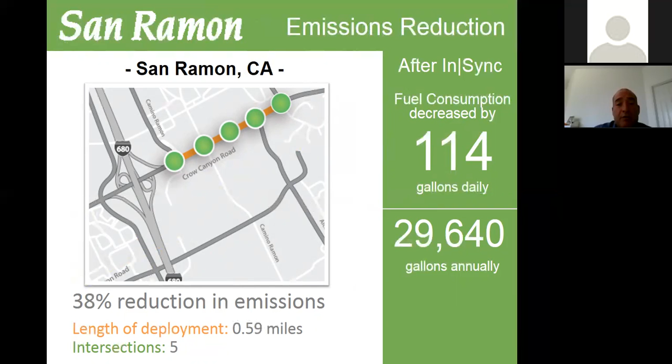And so we're going to use this example here in San Ramon. It's a 5 intersection deployment here on Crow Canyon Road. It's just north of 680. And we were able to cut down on the fuel consumption daily by 114 gallons just on those 5 intersections. And if you were to calculate that out throughout the year on a 5-day work week, that would be almost 30,000 gallons of fuel annually.

Here's another impact scenario and success story for us. In San Diego, the La Jolla Parkway. InSync is great on cutting down start and stop delays through an arterial. It's great for bidirectional progression, cutting down and better balancing the delay of a system. But what happens when we introduce InSync into a completely saturated system?

The city of San Diego wanted to give us one of their toughest saturated areas to try to manage. And they found it here on La Jolla Parkway and Torrey Pines Road. It's just 3 intersections. And the reason there's so much saturation is due to the variability in traffic that can happen. As you can see here, the La Jolla Parkway and Torrey Pines Road, all of that leads to the beach. So you can imagine the variable traffic that can happen unexpectedly during the day and throughout the year and throughout the week.

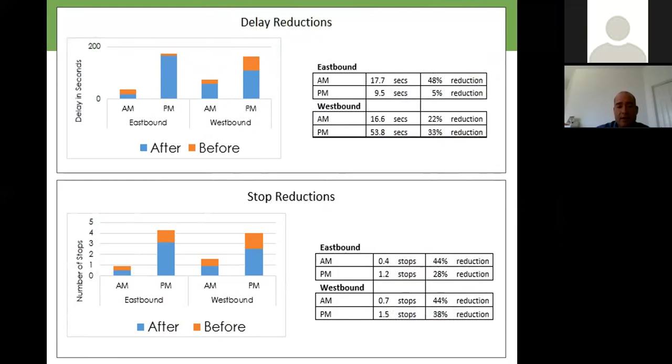Some of our before and afters show the delay and stop reduction improvements that happen on both the AM and the PM peak period. The AM peak eastbound, you can see, shaved almost 18 seconds off of the commute, which was a 48% reduction in time. For the stop reductions, we showed a 28% to a 44% reduction.

And some of the other stats of the travel time and speed, we had an increase of up to 40% in the eastbound direction, nearly a 7 mile per hour increase. We also see the travel time reduction that took place on the westbound, 17 seconds, 13% reduction. And this was just traveling through a very small saturated network.

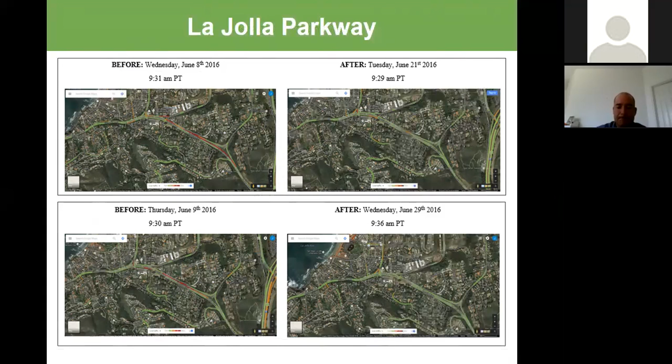So one of our last examples of impact and statistics that we've had on agencies like yours and throughout the United States, North America, frankly, is VDOT did a very extensive study. It was a 5-year study. It was 151 intersections over 13 corridors. And here's some of the numbers that came from that. There was a 67% decrease in stops, 58% increase in average speed, 36% decrease in travel time.

But what was the most telling of the metrics and what impacts us the most, and I would say everyone, is that 17% reduction in total crashes. And it wasn't just rear end crashes, it was angled collisions as well. So the system not only promotes throughput and getting their travelers to their destination safer and faster, but this also starts introducing an element that makes the driver start paying attention to the driving task. And this is critical for safety, that drivers pay attention to the driving task. And InSync has a tremendous impact on that safety.

Also, the mainline travel benefit that you can see here, some of the ROI numbers that a lot of your constituents want to look at, is you can see here that the mainline travel benefit was $43 million from this investment. And as you can see there, annualized out through a benefit cost ratio, it was nearly 9-1.

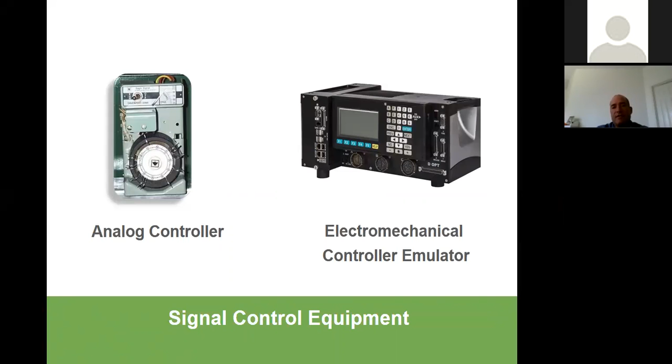But at the end of the day, that latest and greatest traffic controller is just emulating that analog controller on the left. That's why we call these electromechanical controller emulators. They work off of pre-programmed operations, pre-programmed cycles, predetermined sequences. And that little bit of intelligence that has recently been put into these modern controllers, it doesn't help you manage variable traffic any better than the one on the left.

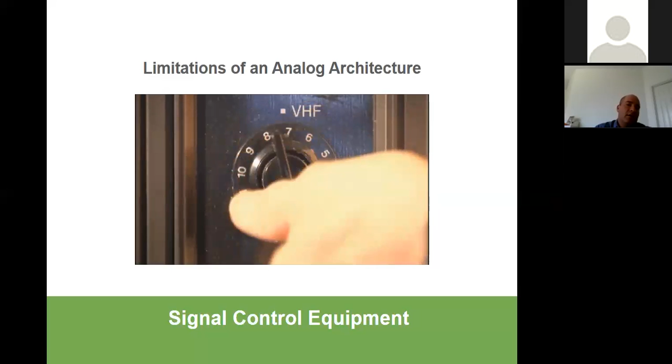So here's a simple example that we like to use to describe these analog operations. Think about an old television set and that dial that you used to have to turn. If you were on channel 5 and wanted to go to channel 10, you had to go through 6, 7, 8, 9, all the way to 10, through all those different states or phases to get to that desired state. So that's an analog architecture. That's what that old electromechanical controller was doing, and it's pretty much what the modern controllers are doing today.

That was adaptive control. It was an intelligent, fully actuated system. It was dynamic, it was flexible, it was fluid, and it could make those changes happen immediately. That control officer was not locked into any cyclic service of any kind. When we changed to those electromechanical controllers, we lost all of that intelligence.

And that's essentially what InSync is. It's an artificial intelligence that sees what's happening in the intersection, and it can look down the line globally, and it can identify these platoons of vehicles to get them through the corridor. It was flexible, it was fluid, it was dynamic, and it was immediate. And that's what we are replicating with the InSync system.

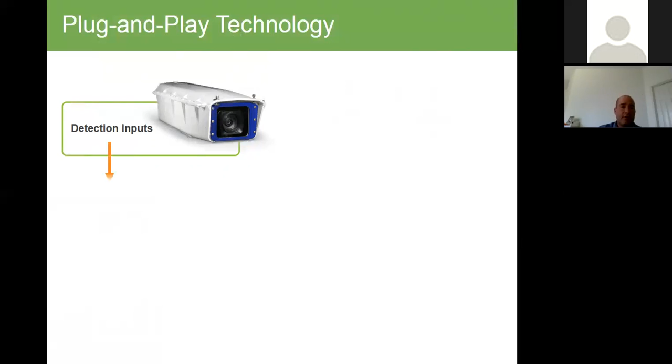And it can assess more than just vehicle presence. It can assess more than just if something's there or not. It can actually assess a queue by lane, and that information is directly put into the processor in the cabinet. That processor receives real-time information, second by second, and because of the ability of InSync to choose its desired state, it can make an immediate action, immediate decision, rather than something based on a cycle-based operation.

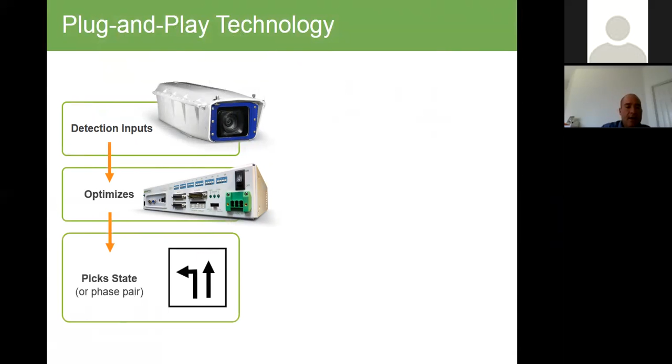InSync doesn't replace anything in your cabinet. It integrates with any type of controller in cabinet. And what InSync does is digitally chooses the state it needs to be in, serves that call to the controller for only those 2 phases to be served.

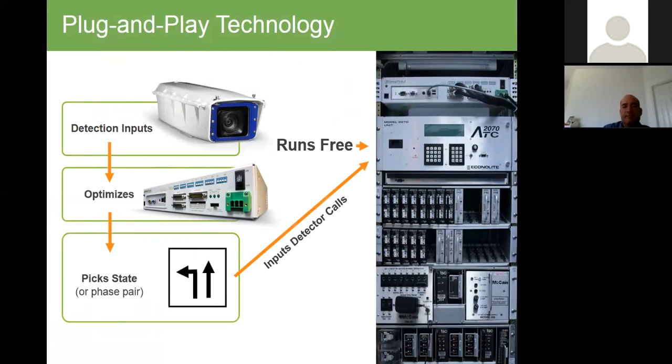Now let's talk about the local optimizer. InSync's cameras are able to do more than just simply view presence detection. During the installation, we not only set up our detection zones in those lanes, but we also draw occupancy segments going across, as you can see there. InSync constantly measures the volume of these occupancy segments and allows it to give it a queue, an actual queue of cars, and it can assess a delay.

These percentage occupancy type and weight numbers help InSync to determine the best way to reduce those numbers, which state to go to next, which has the greatest demand in your intersection. It does this all while achieving great bidirectional progression through this global network of intersections.

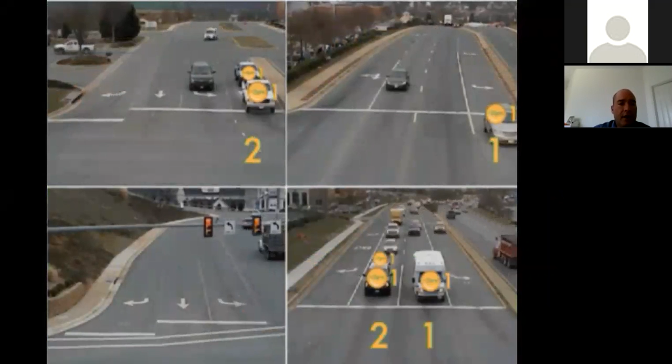And there's a funny analogy that we like to use. It's the greedy algorithm and this greedy cop at the intersection. If you'll look up there in the top left corner of your screen, you can see that when a vehicle pulls up to an intersection, it receives a token. And for every 5 seconds that it's there, it receives another token. And it keeps giving them a token for every 5 seconds for every vehicle that's in the intersection, for as long as they're in the intersection.

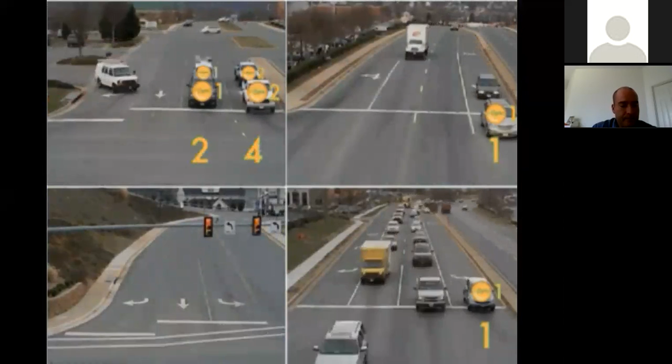But our traffic cop is a greedy cop, and he doesn't want to give out those tokens. He wants to get those tokens back. He wants to keep the vehicles moving. So what that greedy algorithm does is it turns to the state that has the most demand, that has the most tokens. That state gets the attention first. So in using that greedy algorithm, InSync can optimize at the local intersection based on real-time demand and delay.

The second-by-second analysis of the intersection ensures that each phase is being served with a priority and not a predetermined cycle. If we see here at our phase sequence A1, we need 18 seconds, we can give it 18 seconds. If we find out as the cars move through, it needed less, we can then move on to the next phase. If we see that we need to extend that queue, then we can do that as well.

But as you see, we don't have to move to A2 in our sequence next. We can simply say, if C2 would be best served, then that's what we can go to immediately next. So not only can InSync make mid-cycle changes, we're able to make mid-sequence changes as well. And if we put that together with the global optimizer InSync has built in, we have the most powerful adaptive system on the market today.

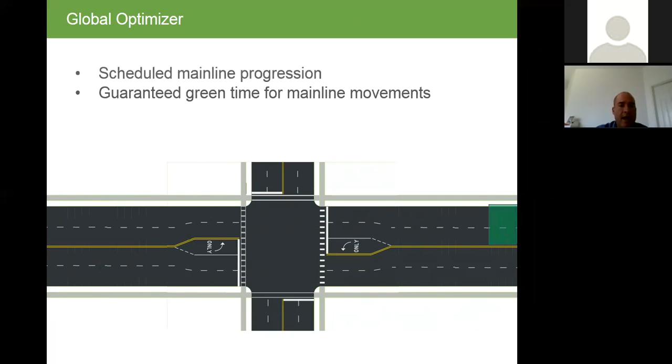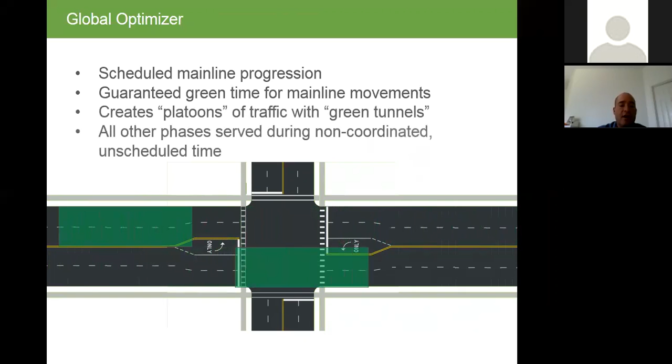So when looking at the global optimizer, it will schedule mainline progression, and our aim is to create these platoons of traffic moving through these green tunnels. All the other phases are then being served during the non-coordinated, unscheduled time.

So in tying these concepts together, this digital operation that's going on in the intersection, the local optimizer and the global optimizer, we're going to use a calendar here for an example. And if you use Outlook, this may be familiar to you. I'm going to use 30-second increments of time, 10-second increments of time.

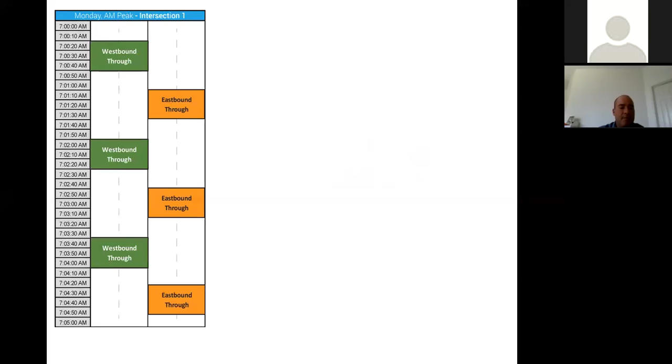And as you can see here on intersection 1, Monday morning, an AM peak, an adaptive configuration. And we may serve the westbound through for 30 seconds, followed by the eastbound through. Now notice they don't have to be scheduled at the same time because that may promote a better bi-directional progression. Now in the global optimizer, we repeat that pattern. Now we have our mainline movements already scheduled for a particular configuration, and we do that for the rest of the intersections in the corridor, intersection 2 and 3 for this example.

Now the time between the start of one coordinated appointment, and when that coordinated appointment starts again, that's called our time between tunnels. So let's take a look at that white space here, this gray area that I have highlighted. That's the time that's unscheduled, those side streets, the uncoordinated through movements.

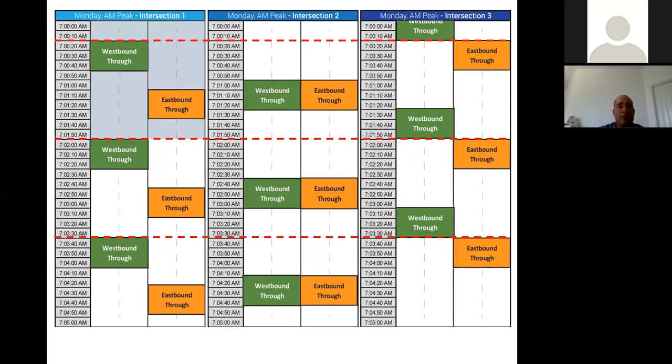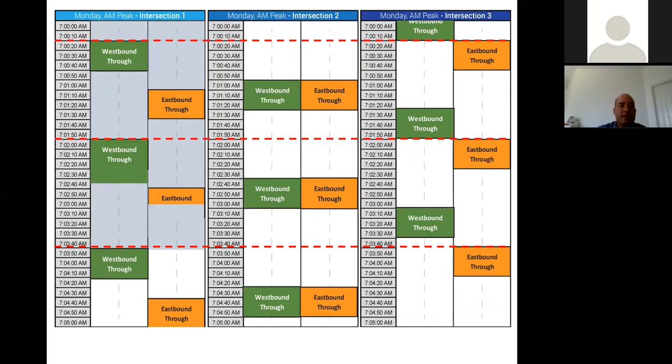This is where the local optimizer will go to work, doing what's best based on the real-time conditions that it sees. So let's say that during this unscheduled time, there's an influx in northbound traffic. InSync says to itself, I didn't have enough time to adequately serve all the movements in my northbound traffic. What it does is it simply calls down to the rest of the intersections in the global network and lets them know that we really need some more time to push this traffic through. So everyone in the network increases its time between the tunnels. And this allows for more unscheduled time to adequately serve all the movements.

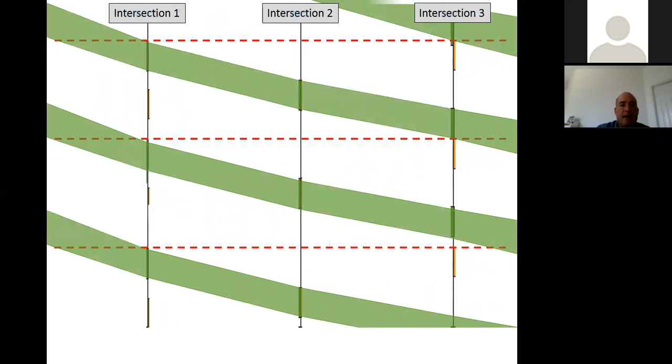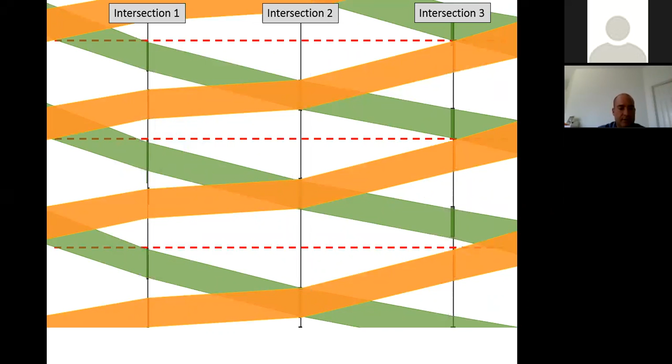So when you shrink that calendar down and you connect the dots, it's upside down, but what you have is a time-space diagram. And where we don't have a global movement, where those black boxes are flashing highlight, that's where that local optimizer is going to work, serving the movements based on real-time conditions. So you can not only make mid-cycle changes, you can make mid-sequence changes as well.

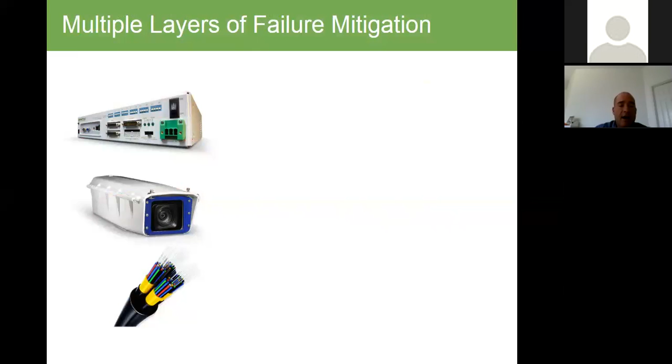We often get asked about failure mitigation. InSync was designed with multiple layers. For example, if a motherboard goes out on one of our processors, it simply falls back to a controller operation by the dip switches that are on the front that allows those detector calls to go through onto the controller and let that controller go ahead and operate in an actuated state. If there's complete failure, we simply fall back to the controller operation. And remember, we're not replacing anything in that cabinet.

If a camera goes down, the InSync processor functions as its own storage device. There's no central server that's reliant upon this data and upon the operation of the system. Each of those processors has 30 days' worth of stored information. If that communication goes down, going into the corridor, well, the processors still continue to communicate. So your adaptive process is still happening.

If the interconnect going into the corridor goes down, the adaptive process still works. You just don't have that ability to grow and shrink the tunnels if that interconnect between the intersection goes down. So these multiple layers of failure mitigation are very important to a continued operation. And not relying on a central server and not relying on communication going into the network for it to continue to work is what InSync is really designed for, to help mitigate some of that downtime and still have an adaptive system that's working.

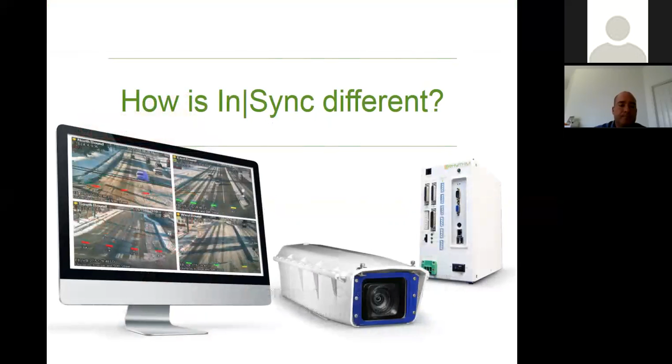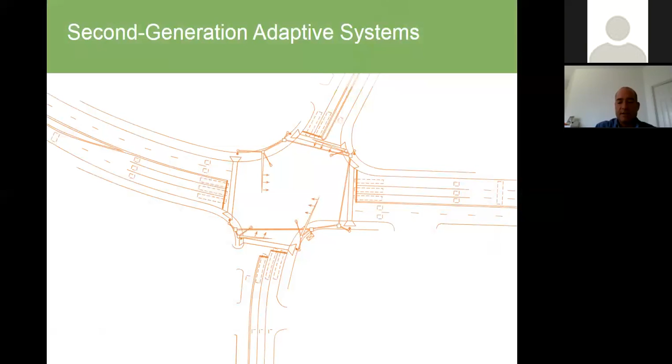So how is InSync different from some of the other systems that are out there? There's a consultancy called Urban Systems Associates in California, and they wrote a paper on the different generations of adaptive. The first generation would be more of a manual-based system. It was developed in Los Angeles back in the mid-'80s. A second generation system is one that can take all that data and all those numbers and try to do considerations for future cycles using that server and its algorithms. But the challenge with those systems is that it requires multiple amounts of detection to get all that data, just to get the best out of the system you have.

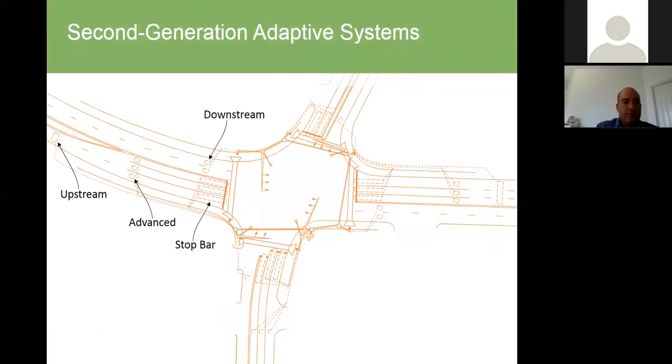So if we throw a few cars onto the intersection here, you can see them triggering detection points, single points of detection. Those could be loops, they could be radars, they could be video. And as you can see, they're placed at the stop bar, in the advanced area and the upstream area. And all this might be needed to make a second generation even work properly. But even with all those deployed detectors, you're still missing a lot of the gray area, as you can see here. Cars can always be pouring on and off mid-block, and that's passing incorrect information down the corridor.

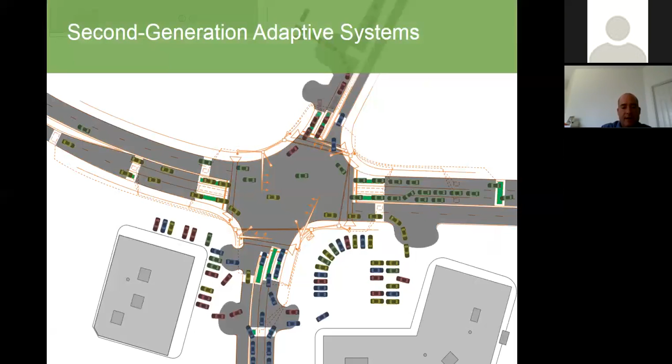So that's why we feel that the distributed architecture of InSync, what Urban Systems calls third generation adaptive, is so much superior. As we introduce these cars on the scene, InSync detectors are able to estimate the entire queue as far back as that camera can see. We really eliminate the significant amount of gray area you saw in the previous slide. We're able to see these cars as they come out of mid-block, and we're not passing on erroneous information down to the next intersection. This is what allows us to make these mid-cycle, mid-sequence changes.

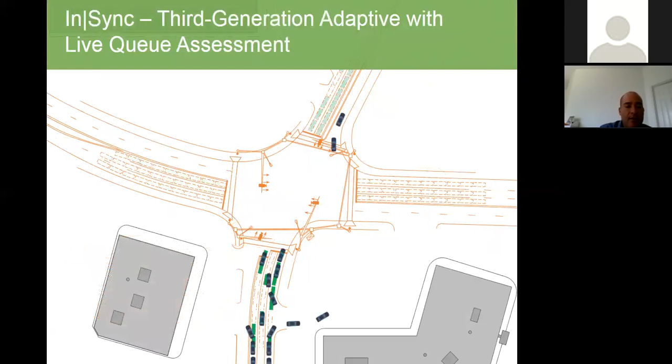So let's compare this on a timing-based system, these responsive type systems of the second generation, compared to the InSync real-time response that the third generation has.

So if you see here, based on the time it takes, if you look at a responsive system, in a second generation system, and it sees that it needs to make a change, that information is pushed to a server. The server then pumps out the new changes that need to be made, but that environment at that intersection has already moved down the road. Not the case with InSync.

Though the mainline movements are pre-programmed and guaranteed within the system, you still have the ability to start and stop those movements early or late. And within that unscheduled time, we're simply serving those phases, those states between the coordinated movements at each intersection. You have the ability to extend those phases, extend the tunnels, truncate the tunnels. And every time you turn back to that local optimizer, the pattern may be completely different. Sequencing may be different.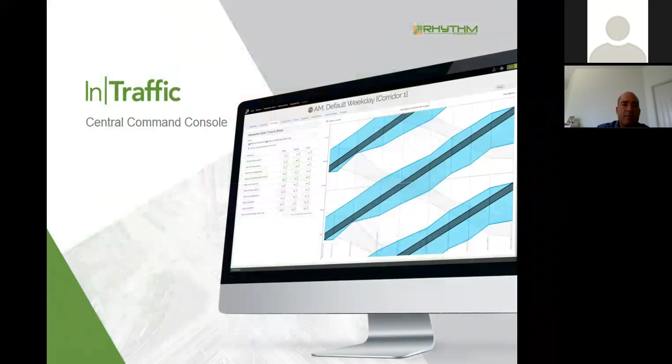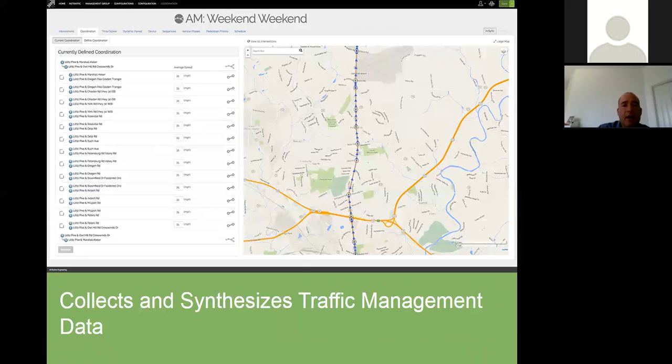Also, InSync has extensive software to help you control all of this. InTraffic is our central command console. You can access this software anywhere. It's not reliant on a server. You can use it from any device that can access your organization's internet. We collect a ton of data, and we're able to push that data to you to help you better manage your system.

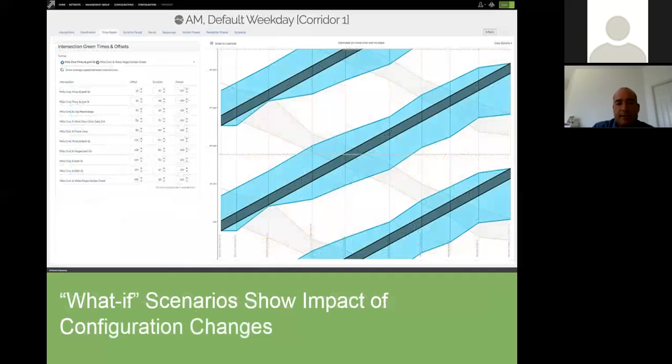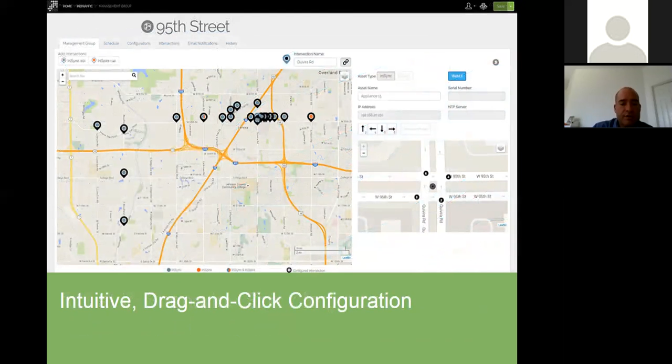You can look at different adaptive configurations. You can do what-if scenarios. You can adjust your green time and sequence and cycle lengths. You can also group your signals together. Maybe it facilitates a better flow through different corridors. And we do that through our intuitive drag and click configuration.

And with our web UI, you can log in to look at your signals. You can see the real-time data and statistics that are going on. And all of this is collected and reported in a visualization program called Inform.

Rhythm Engineering also has a very extensive service department to make these deployments more successful. We're available 24/7, 365. What happens is we come out during the installation to make sure that all the equipment is getting mounted properly and installed, whether it's your internal group or maybe the local contractor that's been hired. We then run that data for a couple weeks from the hardware. We then return to turn on the adaptive process. Our technicians return and help turn on that process with you.

Glenn Bollinger, a traffic engineer out of Augusta, has said that this process and the way we do it is like having extra traffic signal engineers on staff. The InSync model, after we've left and the system is running, is like having extra traffic signal engineers on staff. We also include a 2-year warranty with our systems.

Regarding the maintenance of our systems, you can spend as much time as you want. We have some agencies that monitor it 24/7, and that's because they have a TMC, a traffic management center, where they're up and watching many different aspects of their environment. And so InSync is always up and running. They're always looking at it. But we also have some agencies that don't log in for months. InSync was designed for that. It's designed for you to manage it as little or as extensively as you want to.